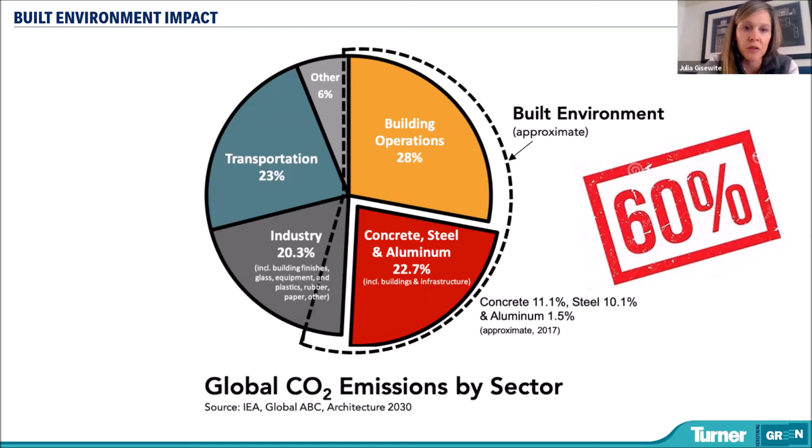And because of who Turner is, and because of the work that we do is 60% of the problem, and because of our size and our presence, and because we always lead when it comes to doing the right thing, we have a responsibility to make headway in this fight against global warming. So Emi, go to the next slide if you don't mind.

So let's break down for a minute what we mean by the built environment and the 60% we're talking about. To do that, we have to think about the entire life cycle of a building. Greenhouse gas emissions are generated at every step along the way: the extraction of raw materials, the transportation of goods, the construction process, the operation of the building over its lifetime, and even the eventual deconstruction 100 years from now. It's all included, and it's a lot of greenhouse gases going into our atmosphere.

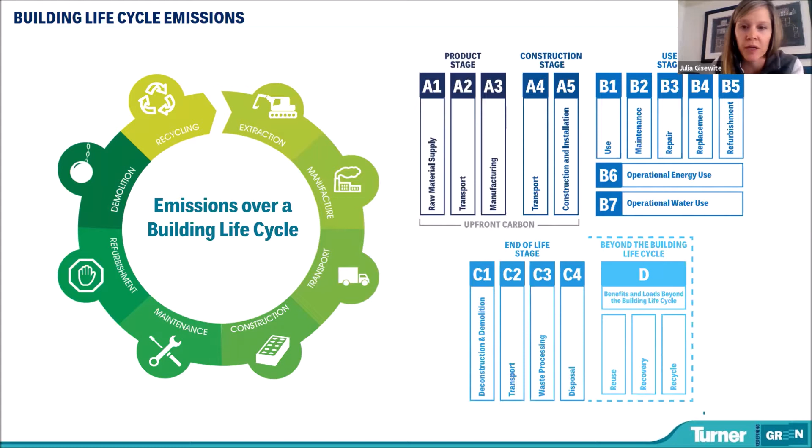A common way the industry likes to represent these phases is shown in the graphic on the right. Each individual step or stage is designated a number, so A1, A2, A3, B1, B2, B3, etc. Now, Emi, if you could go to the next slide.

Now, in all our daily operations at Turner, we can directly impact the emissions produced in stage A5. If you see it highlighted on the top, those are the construction activities that happen within the job site fence. And we can sometimes impact the C1 activities as well, because a lot of our projects involve the demolition of existing buildings at the end of their useful life.

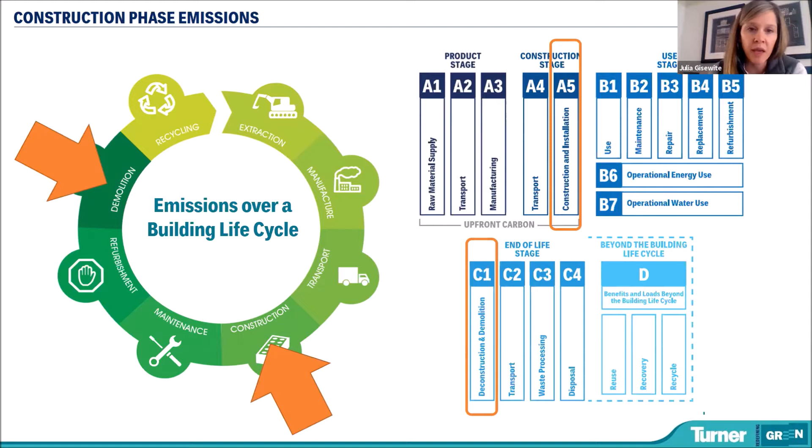And because we can collaborate with our trade partners to directly influence the carbon and water use in these two stages, we felt pretty comfortable being able to make a public commitment around the activities that happen within Turner site gates. And there you have it, our 2030 commitment was born. We committed to reducing the greenhouse gas emissions and water consumption of our on-site operations by 50% by 2030.

And we like to think of the metering program as kind of the first phase in the pursuit of this target. So Emi, next slide. Not only is the data from our first two years of the program going to help establish a baseline against that progressive reduction we're going to have to hit, but it also helps shed light on the sources and trends of what kinds of energy we use and how we use it.

At this point, because of this metering program, we know more than any other company out there about where and when our energy and water is being consumed and at what relative intensities. And this information is gold because it helps prioritize our efforts for impactful reduction. Basically, it's about how we get the biggest bang for our carbon buck.

Okay, next slide, Emi. Okay, so how do we do it? Emi is going to go into a deeper dive on the how, but generally there are two methods we use to gather the data. The first method we refer to is measuring, and this is the collection of data in the form of utility bills and fuel logs that we typically have access to anyway.

These documents are usually available on a monthly basis, and they give us a picture of our month-to-month use, but not much more granular than that. That said, measuring does offer a fairly complete picture of how much energy and water a project uses from start to finish. The other method we use is live metering, and that involves the installation of sub-metering hardware to track our energy and water.

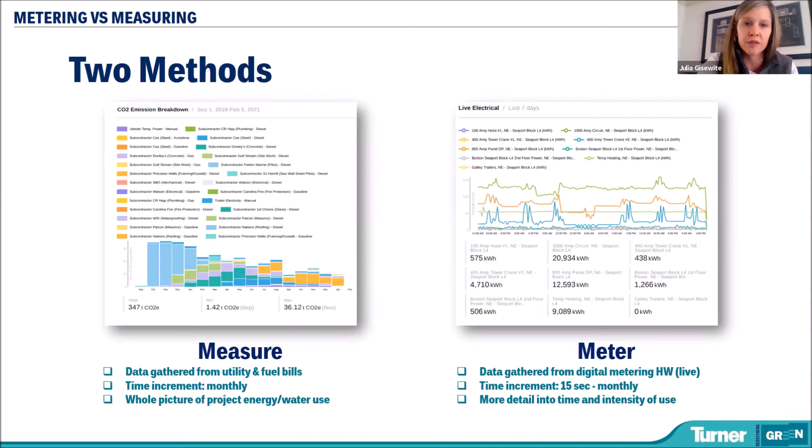So now that you guys have a good basis of understanding of why we meter and our two methods for collecting the data, let's talk about what's going to be new in 2021.

Going forward, as a standard course of business within Turner, all projects over $10 million are going to be considered for metering.

Now, we do have some guidelines that will help determine whether or not your project is a good metering candidate, because not all projects are great candidates. Emi's going to explain more on that in a few minutes.

But if a project is deemed to be a good candidate, the tiered structure that you see on the screen here is going to apply.

Jobs up to $10 million will be able to make their own decisions about whether or not to participate. The idea here is that these are sometimes smaller jobs, often TI projects or smaller, faster ground-ups, where it can be difficult to submeter, or they happen too quickly to get things up and running. So guys, we heard you and understand the real obstacles here, and therefore $0 to $10 million is optional.

Projects in the $10 to $50 million range will be asked to participate in a measuring capacity. That means collecting utility bills and entering them into our BuildingOS platform—no hardware to buy, no hardware to install. The cost savings for projects in this range are pretty significant compared to the way we've done it in the past.

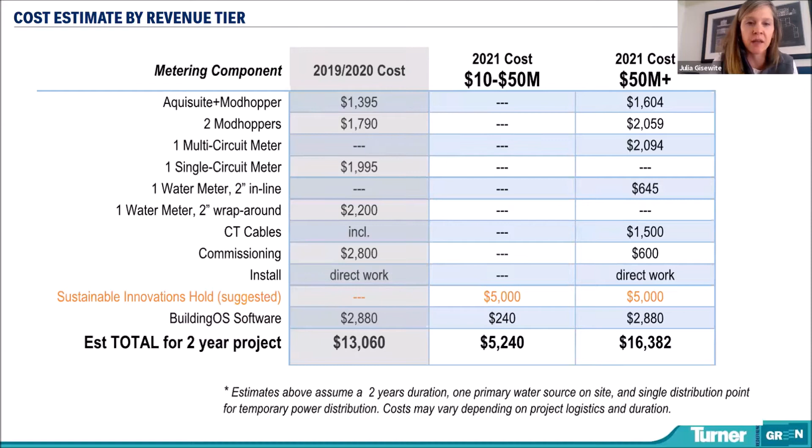For jobs over $50 million, we've estimated about $15,000 to $20,000 over a 2-year job that has a fairly simple utility setup. This will vary a little depending on the logistics of your site, and again, that number also includes that $5,000 hold. So let's talk about that hold for a minute.

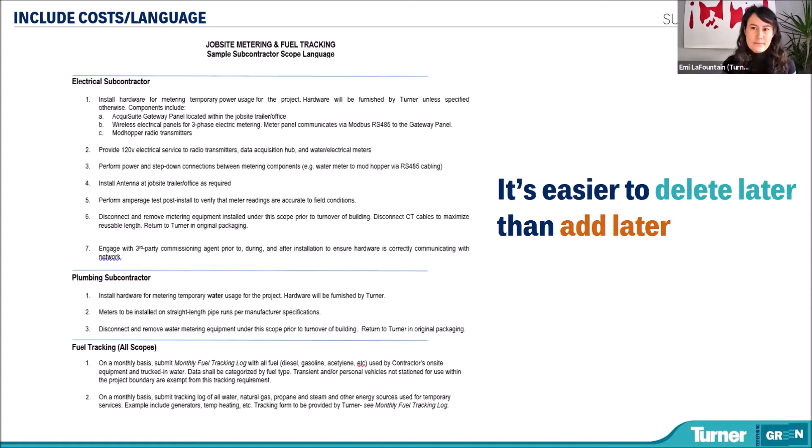Step number 2 is that not every project is a great candidate for metering. You'll want to confirm participation by first connecting with your sustainability manager. That sustainability manager is going to ask for information on the project, like information about the boundaries, how many stories it is, utility layout, etc., and communicate that information back to headquarters. Then headquarters is going to provide the final recommendations to the ops manager, who has the final say on the go, no-go status of metering on that project.

Now, like I said, not every project is a great candidate. Ideally, we look for 3 main things. One of those is access to monthly utility bills from the start to the end of the project. This is really important for a few reasons. One reason is that we use the bills as the Bible in terms of the true usage of consumption on a project. So from shovels in ground until substantial completion, what is that total consumption?

So if you do install meters, maybe a month later the meters go down, you're not depending on those meters for your total consumption over the life of the project. So that's going to be really important. The other reason the utility bills are really important is it helps us calibrate our meters. Once we install the meters, we make sure that for the same duration, we're reading generally in the same range as what the bills tell us for that same period. That's going to be important whether or not it's a metering project.

A second really good candidate is one that can be easily distinguished from other buildings and floors. For example, if you have a campus project where you're putting up 3 buildings and maybe each is turned over at different times, it's going to be pretty hard to distinguish your building's information from the second building in the phase. So phased projects can be difficult. Generally what we like to see is basically if you can draw a line around the project boundary, that's a good idea of whether it's going to be a good candidate or not.

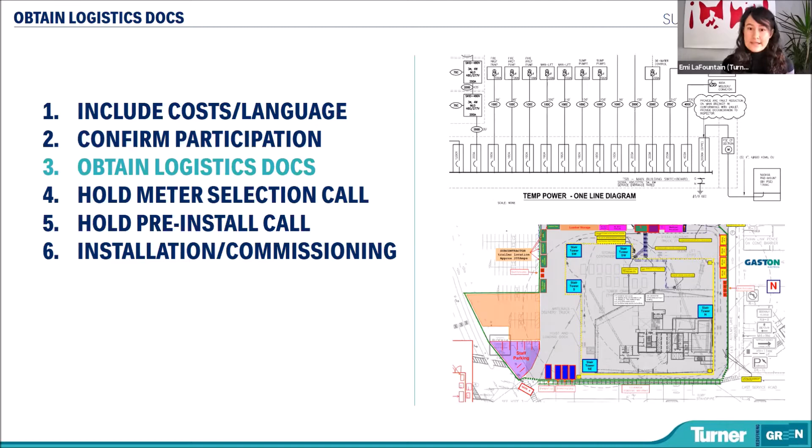The other part of this is the OneLine diagram, and especially if you're a younger engineer, you're not as familiar about this. I want to demystify that a little bit for you. The OneLine diagram is going to be really important for a few reasons, and before we get into that, I wanted to note a few important points about it.

Number 1 is that it's really important to get this early so that we can understand when temp power is scheduled to come online. What we don't want to do is have the temp power come online and then put the meters in, because you're going to have to schedule a shutdown, and it might be a little bit disruptive to the flow of work.

And you're also going to be missing some of that early phase data, which is something that we want to get. So ideally, we can identify the required on-job date for those meters. You can expect a lead time of about 4 to 6 weeks, depending on the intensity of the meter layout we're looking for.

Another comment we get a lot about this is, there's already a meter on our project, so why are we adding additional meters? We had spoken previously about the importance of getting those monthly bills. This meter is installed by the utility company just for billing purposes, and this will give you either a monthly bill with a single number of consumption, or best case scenario, it might already be a pulse meter that gives you a single usage.

So this is really valuable. It's really great that the cities are transitioning towards this, but what it'll give you is just a single line, because this is installed at the main for your project. So if you say, oh wow, that's really interesting, we're using 60 to 70% of our electricity off hours - that's great, what is it? It doesn't really get much more granular than that.

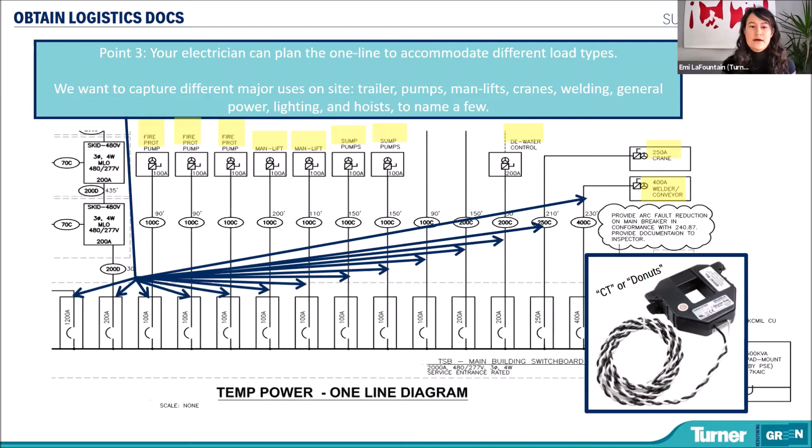And so if you've got something that dictates its own circuit, we would want to put a name to it and identify that consumption trend. The way we measure that is using something called a current transformer, or CT, colloquially referred to as donuts - these are literally amp reading clamps that go around each of these circuits. Then they can actually pull that information in individually. So at the end of the day, when you get it, it'll look like this special graph that highlights those different loads.

So the next step would be to hold a meter selection call. We use a company called Vitality that Julia had mentioned before. This company has been ordering the meters on our behalf. They're very familiar with our program, and they do all the commissioning needs for your project as well. Now, by no means do I want to say you have to use Vitality.

I know in the spirit of competition and having competitive bids, I absolutely welcome you guys to go to the solution that works best for your job site. You can piecemeal it together. You can order the meters yourself. You can have your electricians figure out how to make it communicate to the cloud. I will say that Vitality has kind of been the easy button for us, and this will be kind of the default that we tend to turn to just because they're very familiar with our program. But if you're interested in other ways of getting metering installed on your job site, we can communicate that early on and take that route accordingly.

But the meter selection call will be important. They'll take those two logistics documents that we discussed earlier on, and they'll say, all right, well, based on the layout that you currently have, we're going to need this many meters, etc. They'll ship it out to you.

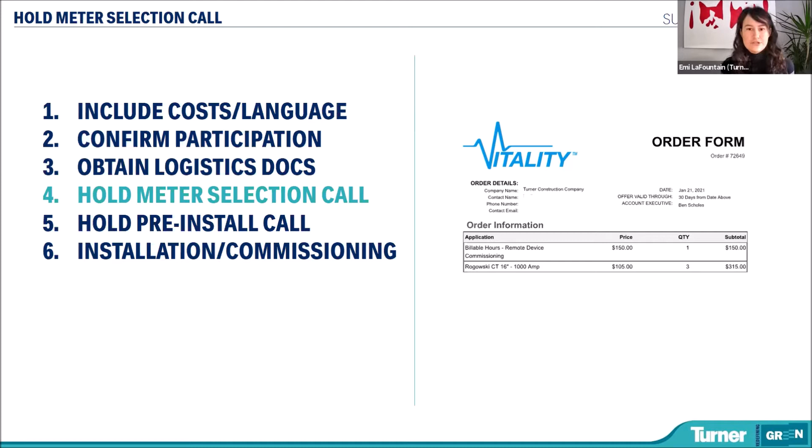And then the next step is to have a pre-installation call. So this is a really great checklist that we go through with the electrician and Vitality on the phone. This is just to go through the order of operations so that when game day comes, everybody is ready. They already know all the requirements for installation on the job site, and it goes by trouble-free.

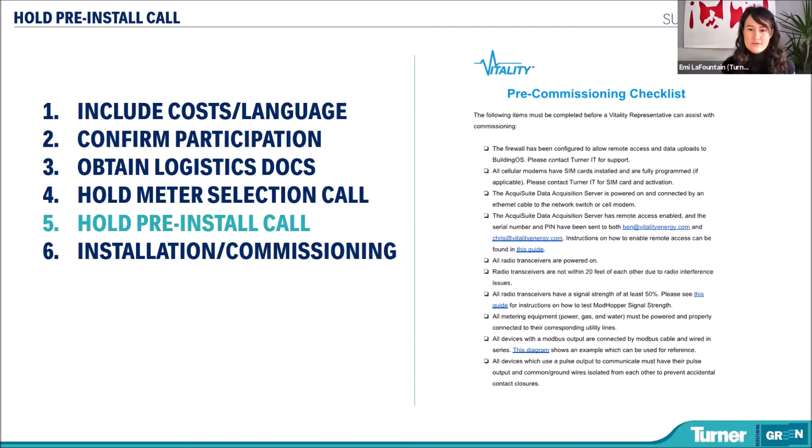And so when it is time for installation and commissioning, your electricians and plumbers are going to be the ones to install these units. Vitality will not be coming out to do that for you. It will be done by your electricians and plumbers. And they'll be on the phone with Vitality, and Vitality will say, push these buttons in this sequence, it should flash up this many times. And once it's up and running and online, Vitality will then make those connections into the cloud so that it shows up on BuildingOS for you.

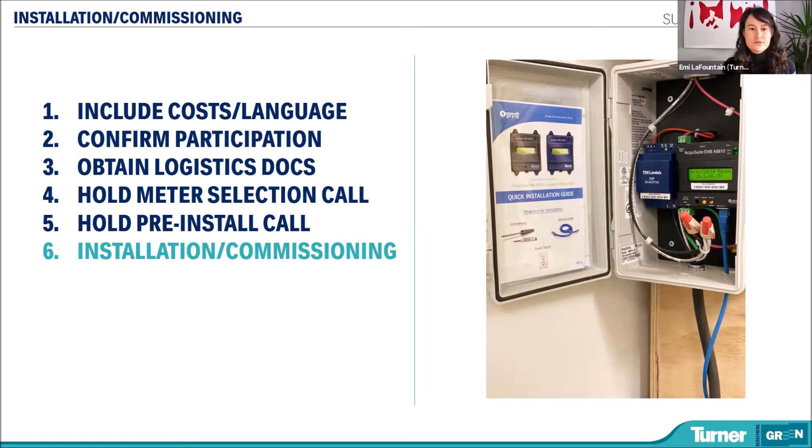So I know that we just went through a lot of steps. Keep in mind that when we actually get your project started on metering, I will be on, or a sustainability manager will be on to help walk through this process as well. So we're not necessarily expecting you to memorize this.

Let's talk a little bit about the hardware. And this is, again, going to get a little bit into the nuts and bolts, but it's going to be pretty important to understand how these things communicate with each other. So if you take a big step back, the important thing to remember is that the systems that we use right now, which we use Obvius meters for the most part, the way that they communicate is via radio. You have your metering points on the field, and they send the information over radio to a data receiver hub in the trailer. So let's take a deeper look.

Now, if you recall back to that OneLine diagram, we've identified all the different circuits at the distribution gear. We've got the CT clamps going around each of those different circuits. Those CTs are going to be wired into something called a multi-circuit meter. A multi-circuit meter basically is just a regular meter, but it has multiple inputs for those different circuits so that it can separate that data and send it out to the cloud as different points to monitor. This is ultimately a lot more cost effective than ordering multiple single circuit meters. So this is the reason why we went that direction.

That multi-circuit meter is going to then have to send out that information. And the way that it does that is by being connected to basically a walkie-talkie. In this meter model, we use something called ModHopper, but it's just a radio. And those are going to be connected using something called RS-485 cabling. Now, that's not going to be really important for you guys on this call, but it will kind of be important to your electricians.

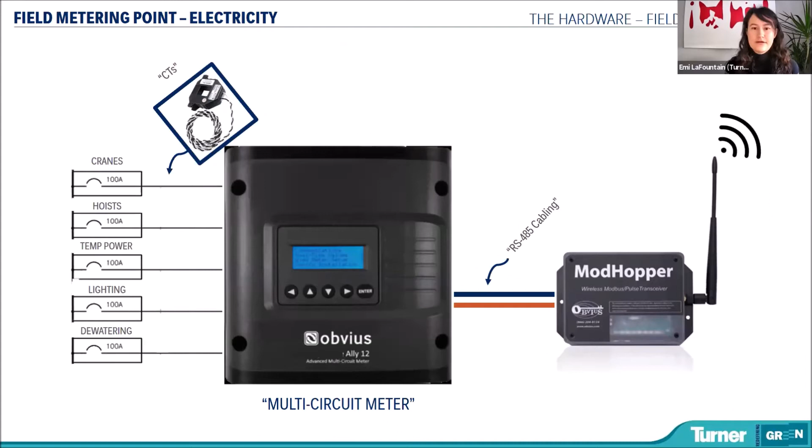So when they ask the question, they're going to want to know exactly how these things get hardwired together, if they're going to have to do that themselves. So this is what sits out in the field.

Now that signal gets sent out and then it gets picked up by another radio that's connected to a data receiver, and this is all sitting in a single box in your trailer. That data receiver takes that information, turns it into hex code, and then makes it compatible for upload into the World Wide Web. So this box is going to be sitting in your trailer.

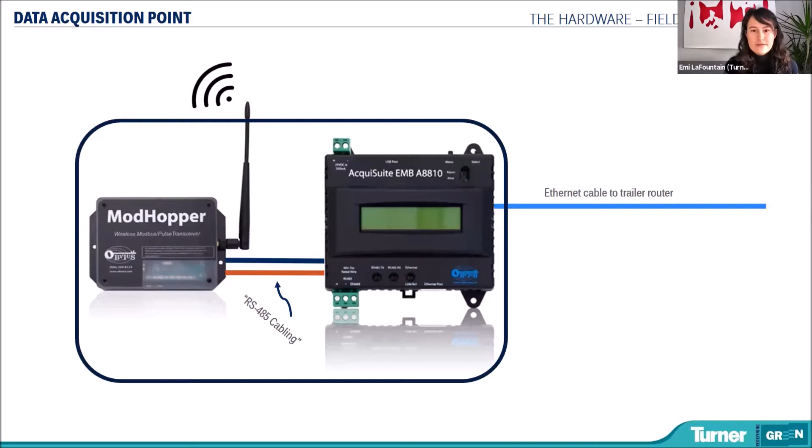Again, these two units are hardwired together using that RS-485 cabling. And then this box is going to be plugged into the Ethernet cable in your trailer. So that's how it talks to the cloud.

The same thing can be said about a water meter. So if you just replace that electrical meter with a water meter, it takes that flow rate, converts it into a digital signal, and sends it out over the cloud, over the radio.

The difference to note about the water meter is that it has to have electricity fed to it because it's not sitting at a distribution gear. So in order for the water meter to run, and the ModHopper to run as well, it's going to need some power fed to it. So that'll be a specific logistical need on your job site.

Now, if your water hydrants are way too far away from any kind of power source, it may not be practical to run electricity to it. In those instances, we might actually suggest just going ahead and reading that manually. You could throw a dumb magnetic meter on it and go out and read it once a month. But ideally, we would start with a digital model, and then if it's not logistically feasible, we might back away and say go ahead and read it.

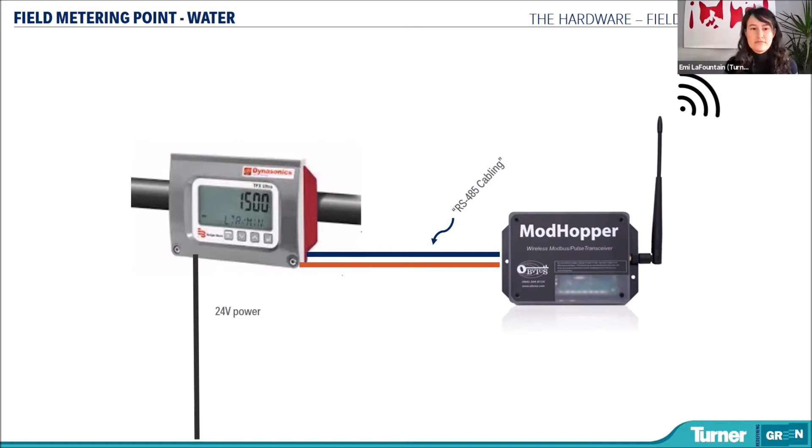So again, putting all the pieces together, you've got your metering points out in the field. They're hooked into radios, and those radios send that information to another radio. This distance should be about 500 feet; if not, you might need a repeater in there. But that other radio catches it and sends it up into the cloud. So hopefully that helps to demystify how these units talk to each other.

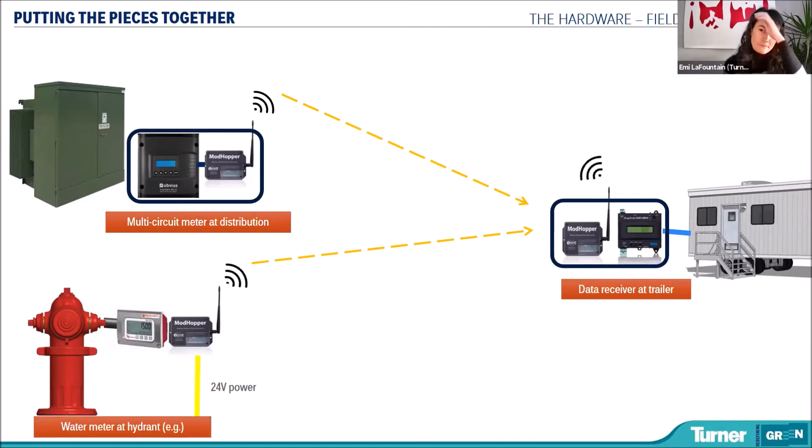So let's talk about once it gets sent up into the cloud, let's talk about how we visualize that. The software that we use is something called BuildingOS. Sometimes we refer to it as Lucid as well. Lucid is the company that makes BuildingOS, so we might use it interchangeably.

Basically, this is a software platform that's open on the web. We have a main Turner account, and from that account we can see all of the projects that are being metered and measured at Turner Construction. So it'll be really cool—you can actually see all the other projects that are in your region, see how you compare to comparable projects, etc.

But this is a really great platform for us because it's a way to aggregate that live meter feed from the field. So you can see when you have live water wastage or when you have electricity being used overnight, you can visualize that here. But it's also really great because you can input fuel tickets and everything, and it'll already convert it into tons of carbon for you.

So ultimately, when we're doing this program, we only care about two things: we care about carbon and we care about water. And so this will help us visualize both of those metrics.

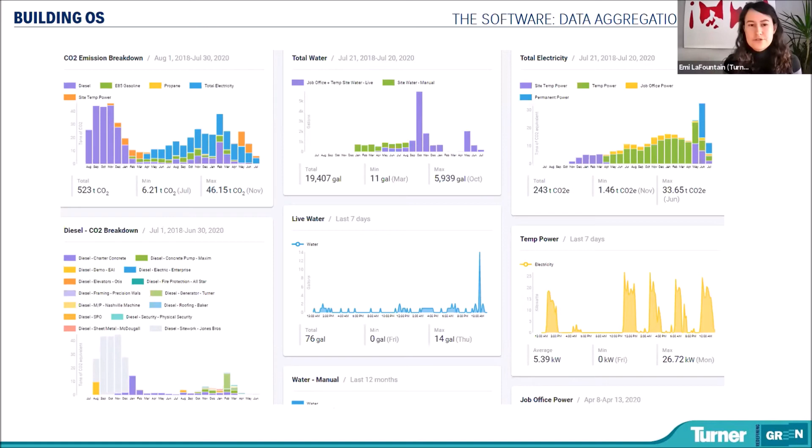Now, the element that we didn't talk about too much before because we were focused on metering is the measuring aspect of it. It's really easy to measure this usage. When you, for example, get fuel tickets from your subcontractors, you will hand them this standard fuel tracking form. They'll fill it out—we used 400 gallons of diesel this month—and send it back to you. And then the entry is just calendar date 1, calendar date 2, usage, save. That's all you really need to do from an entry perspective.

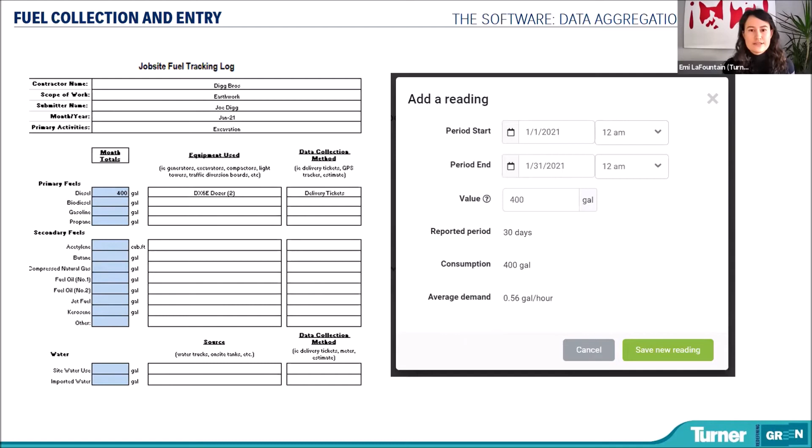So it's pretty simple. The same thing can be said about utility meters. And at the end of the day, what you'll get is this pretty looking graph.

It'll tell you what the biggest portion of the pie is in terms of consumption on your job site, which is ultimately what we're really interested in, because from a reduction standpoint, we really want to tackle the biggest chunk of the pie first to make the biggest impact as soon as possible.

Something that's really cool about this platform too is that sure, it'll take and convert your gallons of fuel into carbon. But another really great thing is that it'll take how many kilowatt hours you guys used, and based on your zip code, it will convert that into tons of carbon as well.

And that's a really important feature because a kilowatt hour of electricity made in Washington, where there's tons of hydroelectric, is going to have a much lower carbon footprint than a kilowatt hour in West Virginia, where they're going to be really coal dependent. So this takes regionality into account.

So you'll find that the electricity footprint for projects more on the East Coast area of the country generally are going to be much higher than those on the West Coast. So this is really an important way to visualize that information.

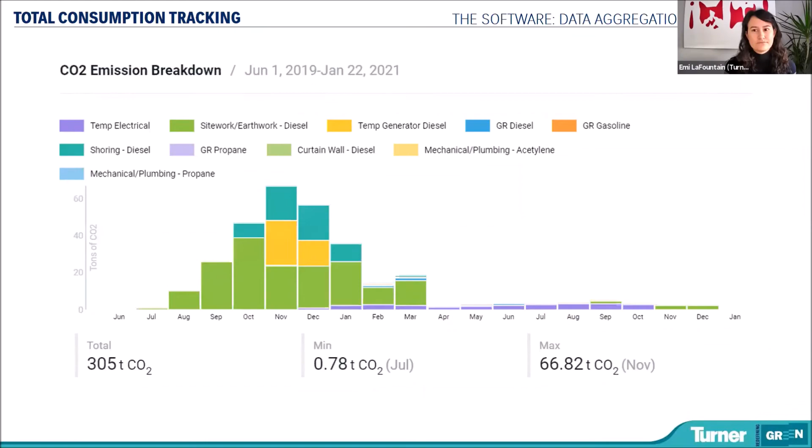If you're in pre-construction, you're going to have 2 primary responsibilities. One of those responsibilities is to make sure that you capture those costs that we talked about earlier on with Julia, and make sure those are captured in the GMP.

So it's not going to be a nasty surprise later on that you're being hit with 16 grand in meter costs, for example. Another thing that's going to be important to do if you're in pre-construction is collaborate with that sustainability manager to verify the candidacy of your project.

So we went through that process of communication, but each sustainability manager has a different role within the business unit. They might not be savvy to the latest in business development or recent wins, so they're going to depend on you guys, if you're in pre-construction, to supply them with that information.

If you're in procurement, I would say that the most important thing is to capture that metering language in the scopes of work. Like I said, if you can get that into your standard business unit templates, that's going to make life much easier later on.

You can delete it if it doesn't apply, but this hopefully will become a fairly easy lift later on as it becomes standardized within our business units.

If you're an MEP engineer, there are 3 asks for you on a project. One is making sure to get that OneLine diagram, and if you can get it early enough in the project and work with your electrician to develop that, making sure that we're making those circuits according to those different load needs that we want to monitor.